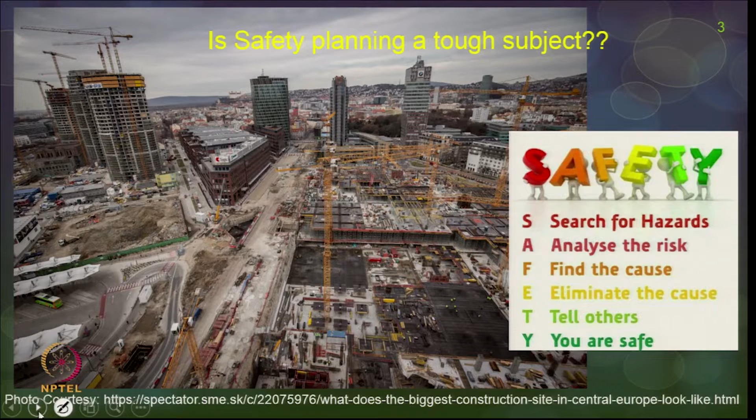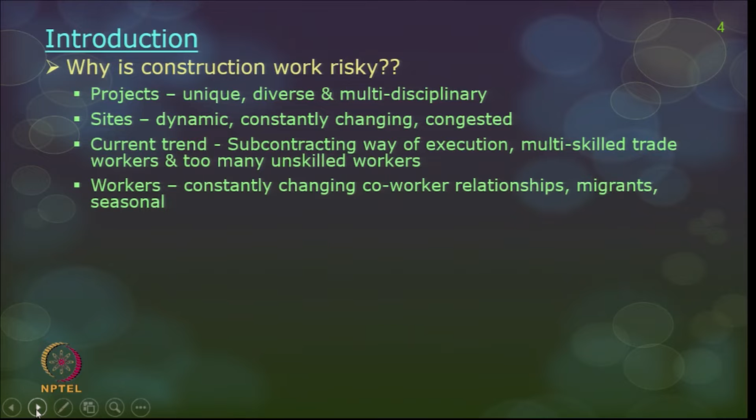Let us talk about why in construction we are not able to achieve a safe environment compared to other sectors. For example, safety is a major concern in every sector like aerospace or manufacturing, but why in construction is it so fuzzy, and why is it not achieved even till date? There are so many factors which are unique to construction projects alone, and let us discuss a few of them.

As such, let us talk about the projects. Most of these projects are unique. For example, if you do manufacturing of a car, you may be manufacturing the same model repeatedly, so you know what the hazards are, you know the sequence without too much complication, you know what safety precaution will suit you best, and so on.

In construction, projects are unique, so the learning you get in one project you may not be able to apply in the next 4 or 5 projects. That knowledge and experience you got in one project you may only apply after 5 or 10 projects. That doesn't happen in other sectors.

Construction projects are always very diverse. You have so many engineers, starting from architects, structural engineers, MEP engineers, then consultants, vendors, suppliers. So many people come in and play their role. It's actually meeting different minds, and at the same time getting work progress done while maintaining a safe environment is quite challenging. As a result, projects are most often multidisciplinary.

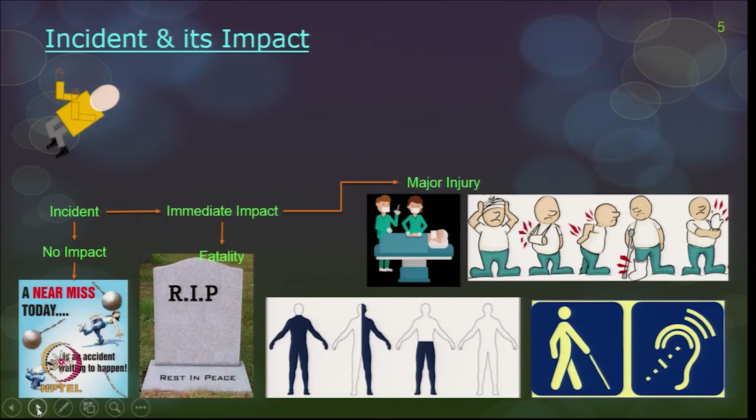Moving from the most serious impact to the less serious ones: the next one is major injury, interchangeably also called an accident. So what is an accident? Maybe you get paralyzed - and there are many types of paralysis, as seen in this picture, either one-side paralysis or complete body except the head paralysis. There are so many medical terms for this. Or you get hurt very seriously such that you lose your hands or legs or any limb, or you become deaf, or something like that. These are all examples of a major injury.

Minor injury - maybe you get a fracture or a contusion, or there's swelling in your organs, something like that, where you get recovered and are back to work. This is colloquially expressed as injury also. So, from the most severe impact: first fatality, then major injury or accident, then minor injury or injury, and then near miss. Then first aid cases are also there - first aid cases are not even visible in any construction site.

First aid cases, you go to the first aid center and get treated within 1 to 2 days maximum, then you return back to work. So, they are not that serious in any construction sites.

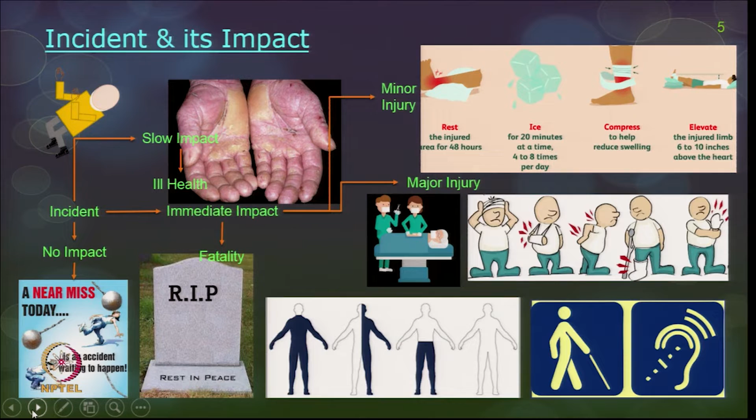The other one is slow impact. There can be hazards which create slow impact onto the workers. For example, if you work continuously handling cement without wearing proper gloves, after some point of time you may see a lot of cement dermatitis. These will not happen in just 1 or 2 days, it happens maybe for several years down the line, 3 to 5 years, or some impact can even happen 10 years later. So these are all called health issues.

Now if you look at incident impacts, I am just categorizing everything together. Incident has either no impact, which is called near miss, or immediate impact which gives minor injury, major injury, or a fatality, and a slow hazard impact we call health issues.

If you look at the history of safety, which we will discuss a little later, so far people were worried about only the visible impacts, whatever we call minor injury, major injury, and fatality. That was what was really seen by construction groups, and their safety programs and policies were most often focused only on safety issues in construction.

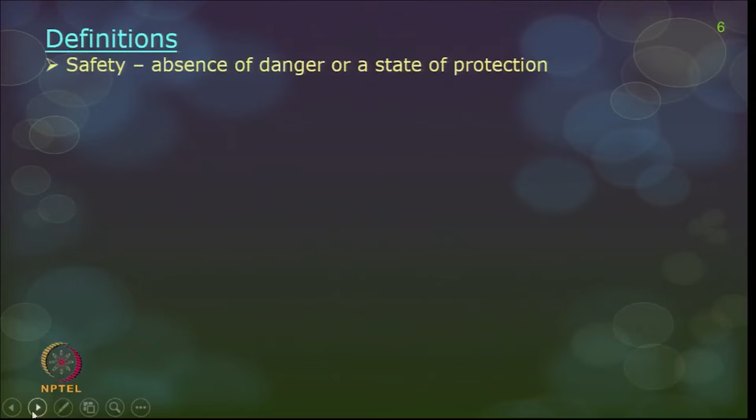So now let us talk about the definitions. What is safety? Safety is always defined as an absence of danger or a state of protection. Then a few of the terminology which we have seen in the previous slide.

Number one is incident. Any incident is an unplanned, unwanted, unexpected, unfortunate event which disrupts the work process and may cause injury or damage. Based on the impact, one is near miss, incidents where no property was damaged, no personal injury sustained, but given a slight shift in time or position, damage or injury easily could have occurred and did not happen this round because of the luck factor.

Now there are some things which have come in the definition. If you look at safety, most of the focus is only on personal injury, in the sense only on the workers' injury. But safety as such has to take care of equipment and materials in the site, and also on the personnel, which implies workers on the site and other human beings on the site. But colloquially, most safety norms and policies are primarily towards workers' well-being in the sites only.

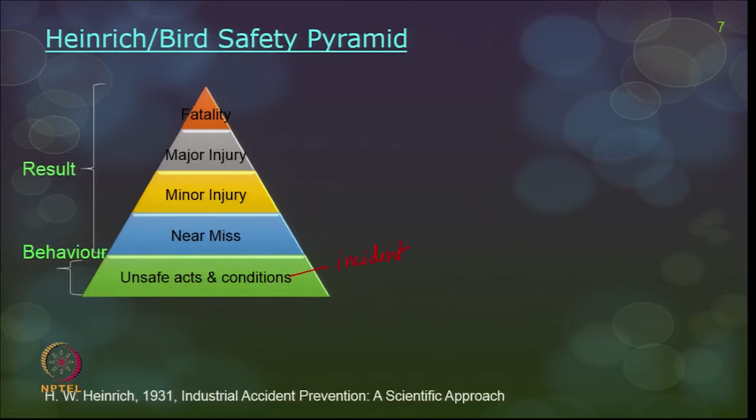This is primarily a safety pyramid. Now, these near misses, minor injury, major injury, or fatality all happen as a result of some incident. As we discussed in the previous class, an incident is of two types: one is unsafe act, the other is unsafe condition.

In many construction sites, as I told you, there may be one or two fatalities that can happen. That is what the statistics talk about. Major injuries can also occur in a normal construction site—we are not talking about complicated or complex projects. In a regular construction site, maximum 1 or 2 fatalities happen these days.

If you look at major injury, there may be at least 30 to 40 major injuries, against at least 300 minor injuries, and near misses can be even up to a lakh. This is some of the thumb rule which happens these days in many construction sites.

But is it really easy to document everything? It is not that easy to document all these issues which happen in the construction site. Most probably the fatality goes into documentation, and major injury goes into documentation.

So the visible portion can be compared to an iceberg. If you see an iceberg, only the portion which is visible is very small compared to the iceberg which actually lies below the sea level. A lot of the hazards which are still available in construction sites go undocumented.

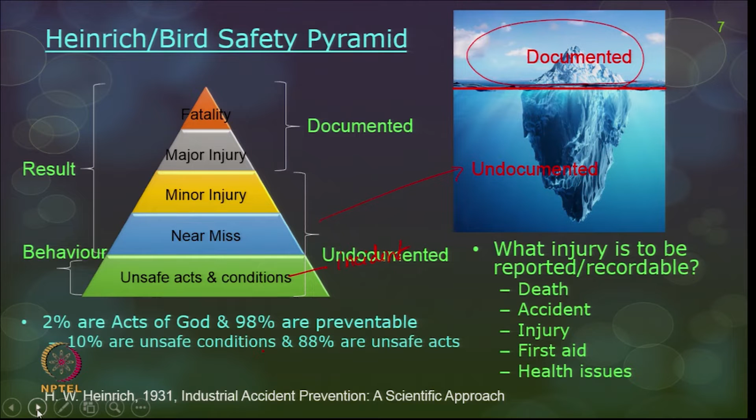Any death obviously has to be reported - the reason for death, why it happened, where it happened, what really happened, what did the worker not do, what precautions did the management not take. So all this has to be reported.

Any accident which happens on site which implies major injury has to be reported for sure. Minor injury, yes, if possible, and if you have a system in place wherein you can record all your minor injuries, yes, it also has to be reported.

First aid cases, yes, including near misses, also have to be reported if you want to have a complete zero accidents record in a construction site. Near misses and first aid cases, even though there are too many happening every day, there should still be a policy of reporting and documenting everything, which should be used as a learning lesson for all the workers.

Last but not least, health issues also have to be reported these days.

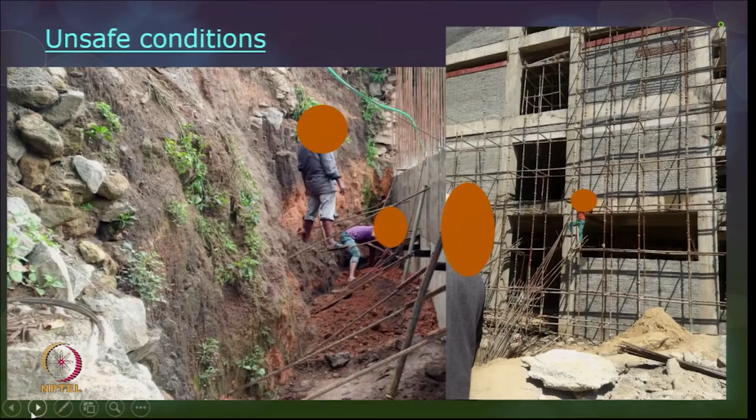Here also you cannot avoid working on these scaffolds and climbing up to do all your construction progress work. So this is primarily an unsafe condition, but there could have been a provision for safeguarding the environment. Still there could have been provision for safeguarding the environment.

The next is unsafe acts. Unsafe acts are primarily ignorance of any safety rule. For example, in this first photograph, the workers are not even wearing proper PPE, not even proper safety clothes, shoes, or a hat while working in a construction site.

So what is this unsafe act and unsafe condition? Unsafe act - it is an activity that is not done according to the safety standards, that is primarily called unsafe act. Examples can be failure to wear PPE, that is the number one unsafe act in construction sites.

Ignoring tool defects - maybe today you were operating some equipment, it didn't work, and you do not even take any precautions in reporting it to the management, and still you try to operate and complete your work. Or you do not know how to operate equipment and you try to mess with its functioning. All these are examples of unsafe acts.

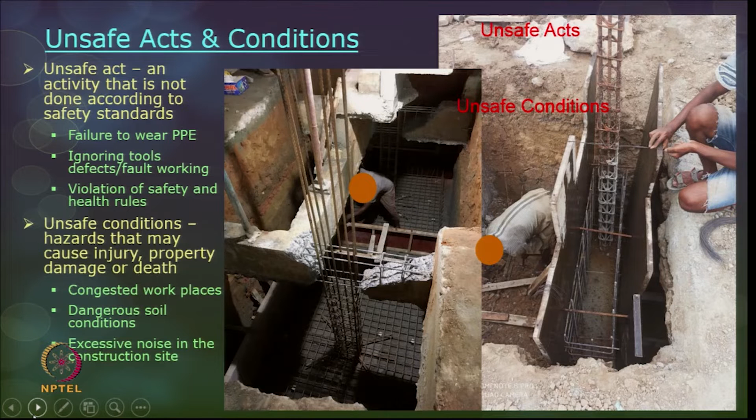Excessive noise in the construction site is also an unsafe condition. You are working in a very big construction site, not operating any equipment, but all around you there are so many equipments producing lots of noise, above the permissible decibel levels. When you're in the midst of so many equipments, your mind will not be at peace and concentrating on safety. So this is an example of unsafe conditions.

The next term which came along together in the introduction was hazard. Many of these terms are used colloquially in so many places, but now you learn the different terms and try to put the proper terms when talking about safety.

Hazard means an inherent property or ability of something to cause harm. As such, hazard is not dangerous, because there are three types of hazard - one of which we will discuss when talking about hazard analysis as a safety program. So every hazard is not active and will not create any harm.

For example, there is an electrical wire passing along a line with equipment also connected to it which was operating - this is primarily an active hazard. If by mistake you slip or trip onto the electric wire and fall off, it can create lots of hazards. And let's complicate the issue further - maybe it's lying along a floor where curing is happening, and curing has water beneath it. So then it's a very serious and active hazard.

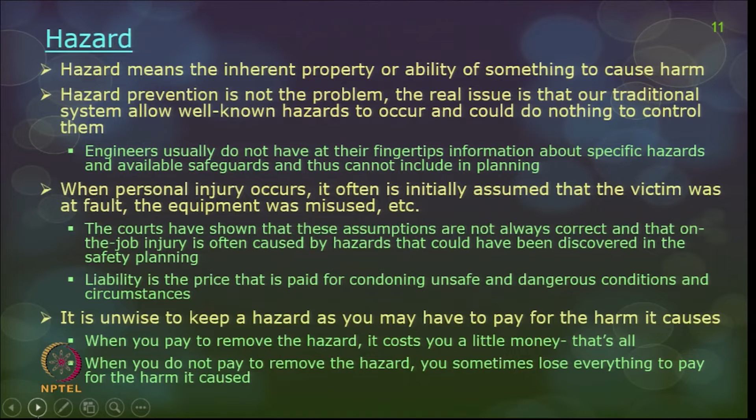So, it is unwise to keep a hazard, as you may have to pay for the harm it causes. When you have to remove it, you have to spend a little money on it. But if you do not try to remove it thinking you may have to spend money, you may have to pay even more than what you anticipated. Sometimes you may have to lose everything to pay for the harm it caused. That is the real message behind hazard.

So, some researchers have also identified the top hazards in a typical building project, and a few of them are fire, unsafe scaffolds, working platforms, open shafts and edges, unsafe electrical equipment, unsafe excavations, unsafe cantilever loading platforms, struck by foreign objects, falling objects, unstable or unsafe structural membranes, overloaded vehicles and forklifts.

Unstable mobile crane, unsafe lifting operations, unsafe working at height, unguarded machinery, and unsafe access or egress.

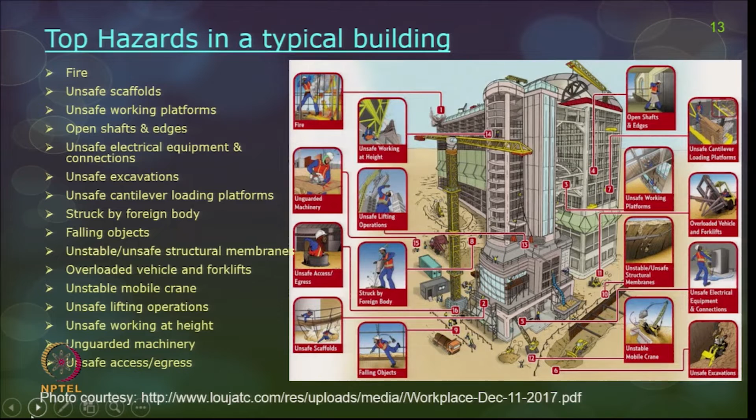So, there are a lot of hazards still available in construction sites, and if you closely watch a project and take note of all this, then you can actually think of a lot of corrective measures and preventive measures for accidents.

Now let us move on into the terminology. So far we have discussed a lot of terminology like fatality, major injury, minor injury, incident, near misses, unsafe acts, unsafe conditions, and hazard.

Now, we will again move back to what is fatality, major injury, and minor injury, and how it is in the present scenario in the construction site. As I told, this pyramid has a lot of numbers attached to it.

Heinrich has proposed that for any one major injury there might be almost 29 minor injuries and 300 near misses. In a way it is 1:30:300.

A lot of researchers have given different numbers, and these numbers have come from different times and from different groups of construction projects. If you want to know how many, this number is quite necessary, because you have to think of safety precautions, how many safety programs and investment on safety you primarily do based on some assessment of these numbers in your project. So you may have to have an understanding of the number.

Accordingly, the other ratios are 1:100:10,000, 1:10:600, and like this there are so many numbers available.

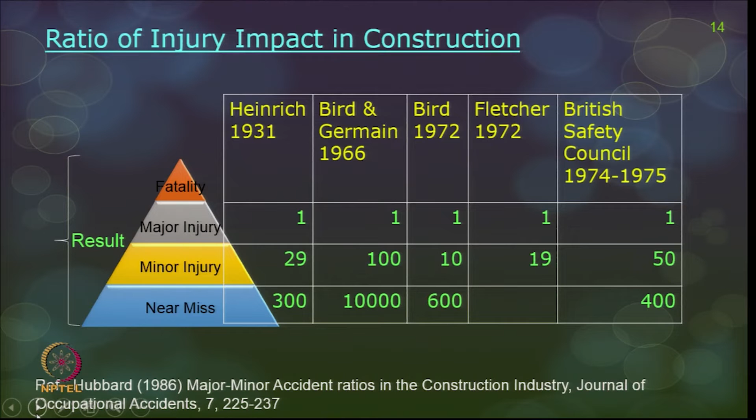So understand, the pyramid always has so many near misses compared to major injuries, and so many minor injuries compared to major injuries, and the same way with fatality. That pyramid still exists. Now let us talk about fatality.

We will go again from the severe impact to the least impact. Number one is fatality. If you look at projects which happened like 50-60 years back, in the 1940s, 1930s, or 1869 and so on, there are very famous projects existing even today, treated as wonders of the world. But if you talk about safety and the number of fatalities that happened, so many of these projects are really considered the deadliest construction projects. Let us discuss a few of them.

The Great Wall of China had almost 10 lakh deaths during construction - and this is only the reported case. The Great Wall of China had many deaths during its construction, and the Burma-Siam railway is actually treated as the death railway because so many workers died during its construction - almost close to 1 lakh people died. The Suez Canal again had 1,20,000 deaths.

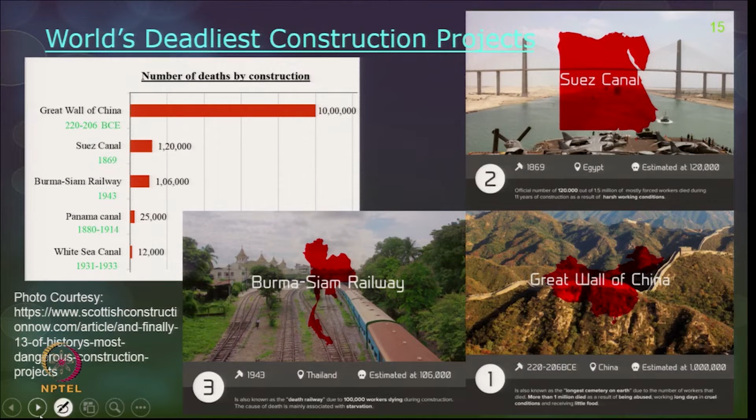So with projects like this, earlier projects had so many deaths, and from then onwards safety became a serious concern. Now if you see, a lot of this fatality has been really cut down, and today, where are the fatalities in a construction project?

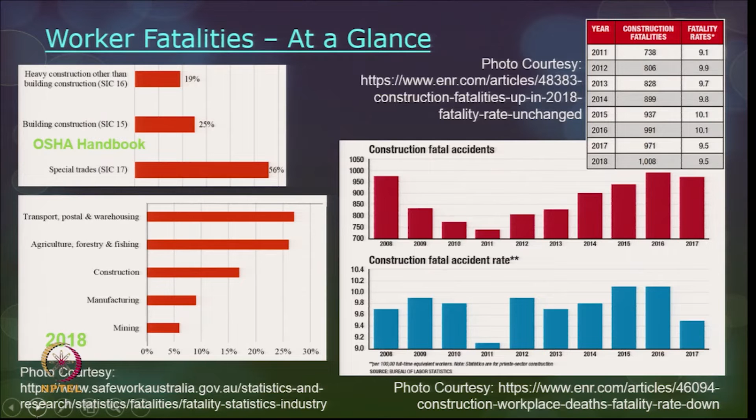There can be so many reasons - maybe there were fatalities which were not reported and the reasons were not identified, so it was not reported. There can be real reasons behind the fluctuations in the death rate, but you should still understand that fatalities are still happening in construction sites, which has to be cut down.

Now if you look at one infographic which says, according to data from the Bureau of Labor Statistics, for 10.3 million workers employed in the construction industry, 991 construction workers were killed on the job. That is the statistic we saw in the previous slide for 2016. For these 991 fatalities, almost 82,760 non-fatal injuries and illnesses have happened - this is actually a combination of major injury and minor injury put together.

So what people generally say is, more than fatality, major injuries are real pain and a major problem to construction workers. With fatality, the worker is no more, only his family suffers as a result of the loss of the worker. But when you talk about major injury, a person has to survive the remaining part of his life either without his eyes, without his legs, or without his hands, and he has to be dependent on someone for the rest of his life in order to go through it. That is where major injury is treated as very serious, compared even to fatality.

Instead of death, a construction accident can often cause very serious injuries, and deaths resulting from construction accidents are far better than traumatic injuries or illnesses. What about coma or major brain injury where the person is on bed rest and so on? These are all real serious pain and suffering compared to even a fatality. So immediate deaths have some advantages also compared to all these major injuries.

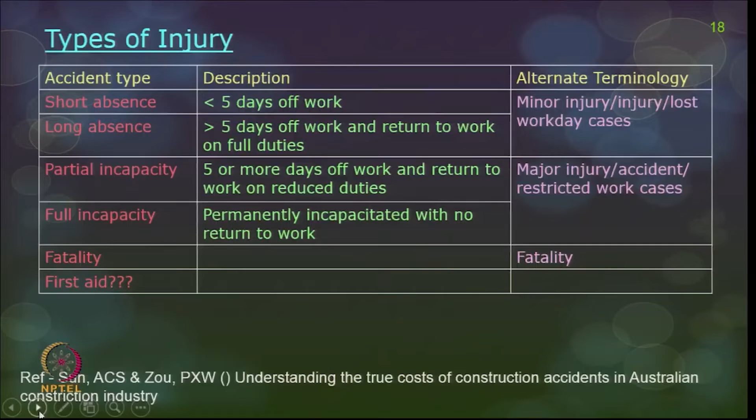Now let us talk about this disability classification. A lot of researchers have talked about so many terminologies. One is short absence, long absence, other one is total incapacity or partial incapacity. Now we will be discussing about permanent disability and total or partial. So total, partial, permanent and temporary.

Again in reverse order, total permanent disability, wherein the worker, after the incident has happened - so now there are two scenarios. One is pre-incident, a worker was fine and fit. Post incident, what is his status? In a total permanent disability, he will be totally disabled and he is permanently disabled. There is no surgery or no alternate solutions provided for him to be fit enough to do any job in the construction site. So a condition in which an individual cannot work due to injuries, examples can be total paralysis, brain injury, mental incapacity or amputation of both hands and legs, both hands or both legs or both together, then he is not fit enough to do any job later on. So he is jobless after the incident has happened.

The next one is partial permanent disability. Partially he is disabled and permanently he is disabled. For example, loss of one eye, with another eye he can still manage and do some job. So partially he is disabled, so he can do some little risky job in the construction site. He may be employable, but the loss of vision on one side is permanent. This is a disability that impacts one's day to day functioning in the workplace. These injured workers generally go back to work once their treatment is over and they are fully recovered, but they cannot do the work with full capacity as they were doing before the accident happened. Examples can be hearing loss, blindness or post traumatic stress disorder and so on.

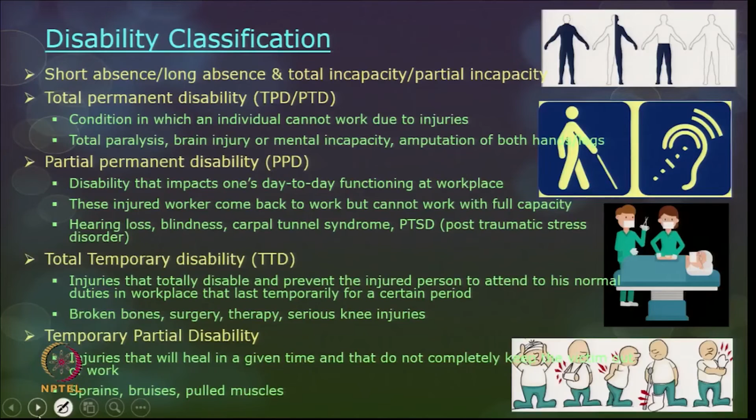But all these result in absence, some sort of productivity loss you show in the construction site. So any safety accident that happens in a construction site has an immediate impact, you see an absence, maybe a short absence or a long absence, but immediately productivity loss happens in the construction site, that you have to keep in mind. So now we will talk about minor injury.

In the previous slide we talked about full capacity, disability and so on. Now what are these minor injuries? Examples are given here. Laceration, for example, a worker has fallen down from the nth floor onto the ground floor, maybe onto reinforcement, and the reinforcement rod has pierced him in several places. So it is not a regular cut and sutures, but irregular cuts and sutures. It is primarily called laceration.

Punctures, as shown in the previous slide on hazards. Hazards like a nail on lumber can be a real example for a puncture or a cut. Fracture, I think it is a very common term. Strains, crushes, sprains, dislocations because of wrong lifting or too heavy loads. Scratches or abrasions which happen when you are handling reinforcement steel or something that does not have a smooth surface. If you handle it with a bare hand, you may have a lot of scratches and abrasions. Contusions, bruises, or internal bleeding which happen as a result of some accident in the construction site.

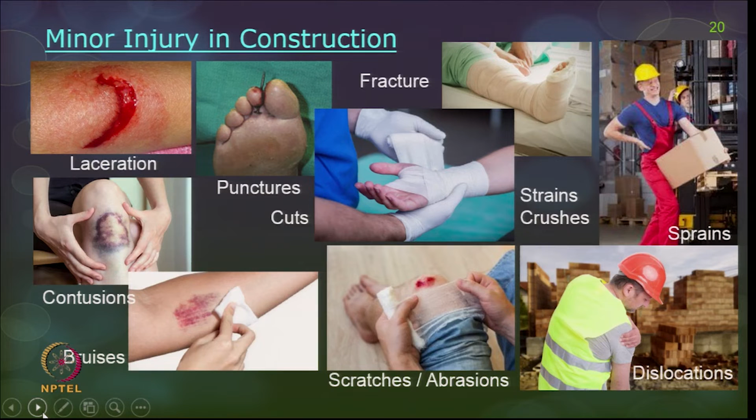So these are all classified as minor injury in construction. If you look at the infographics on minor injury, construction accounts for 31% of fatal injuries, and among all these fatal injuries, at least 31,000 cases are related to ill health issues and so on.

If you look at non-fatal injuries, it can be injury or illness. If you see the trend from 2014 to 2018, it is primarily in terms of lakhs. About 2 lakh something in 2014, and right now in 2018 it is 1,99,000 something. These many injuries and illnesses have been reported.

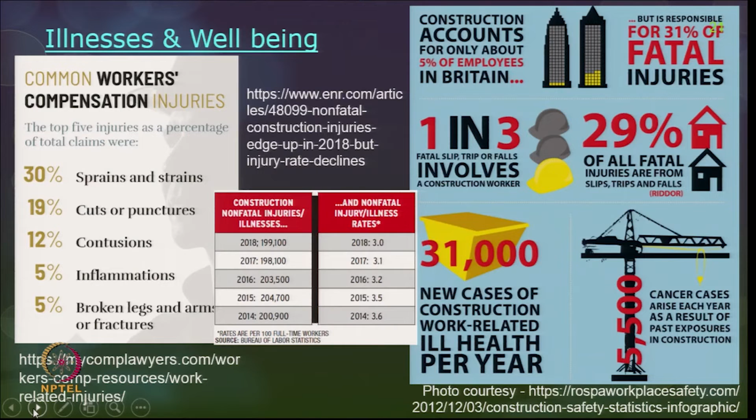If you look at compensation for workers in terms of minor injury, 30% have been spent on sprains and strains, 19% compensation were primarily on cuts or punctures, 12% on contusions, 5% on inflammations, and 5% on fractures. So that is where most of these compensations were paid to workers for minor injury.

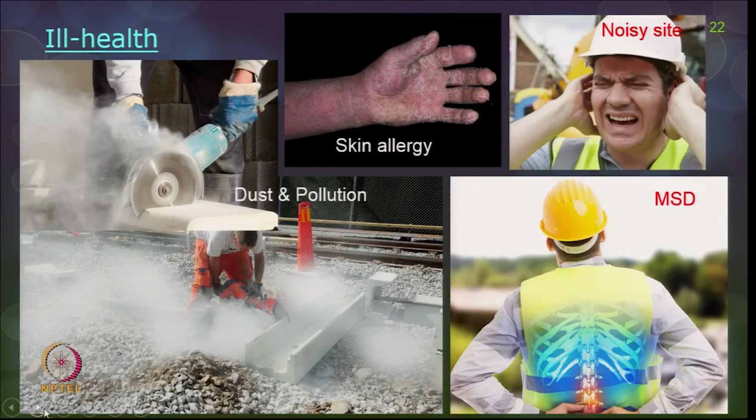Now let us talk about ill health. Ill health examples, the main example is dust and pollution. Any construction site, you cannot avoid the dust and the pollution as a result of the dust. The other one is allergic reactions, primarily because of cement. Every construction these days is dependent on concrete, so skin allergy or dermatitis is the number one health hazard you may see.

The other one is noisy sites, because of a lot of heavy equipment handled in the construction site. Noise levels cannot be compromised in a construction site.

Over some point of time, hearing impact or hearing loss can happen if you do not take proper precautions. The other one is musculoskeletal disorders as a result of wrong lifting of loads. Maybe you have to call a co-worker and get his help in lifting loads if they are too heavy. Instead, if you start doing wrong liftings, you may end up with musculoskeletal disorders.

So what are these adverse health effects? There are so many of them. We will talk about health issues in one of the classes after a few. So any change in body function or the structure of cells that can lead to disease or a health problem.

This can include a disease or change in the way the body functions, grows or develops, effects on children, grandchildren and so on - some problems can be transferred, it's all heredity. Decrease in lifespan, change in mental condition as a result of too much stress or traumatic experiences, and effects on the ability to accommodate additional stress. These are all examples of issues with regard to health.

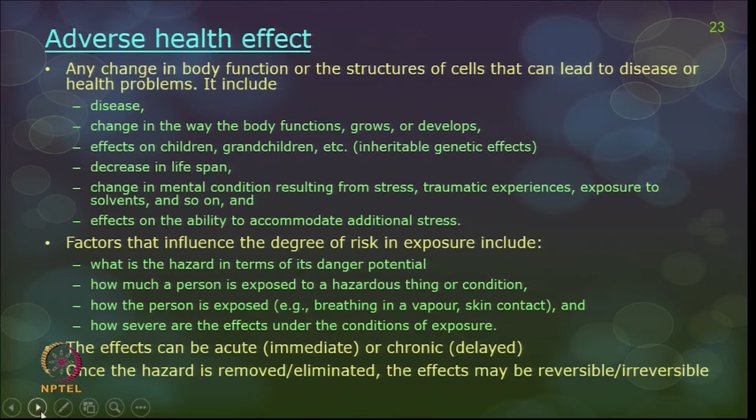The other issue to keep in mind is, once the hazard is removed, eliminated or safeguarded, the effects can sometimes be reversible, and some effects are not reversible. For example, if you start taking treatments and avoid cement exposure or dust exposure, slowly you can be completely recovered. But with any solvents or explosives that have affected workers, some of the effects are irreversible.

Now, what about the growth of the construction industry? So far we have talked about terminologies with regard to accidents, starting from fatality, major injury, minor injury, near misses, and also ill health. Now every time this issue came in - construction projects today are not like how they were earlier.

So what was the growth of the construction industry? Let's not go too far back, let's talk maybe from 40-50 years down the line, from 1960 to present. What has happened? From low rise building structures to a lot of skyscrapers and infrastructure projects these days, like metro or even airports and so on.

If you see the trend, several of these famous, iconic, challenging or mind-blowing structures in the world were built only after the 1980s, with few exceptions built before. Otherwise most of these structures were built only in the recent past.

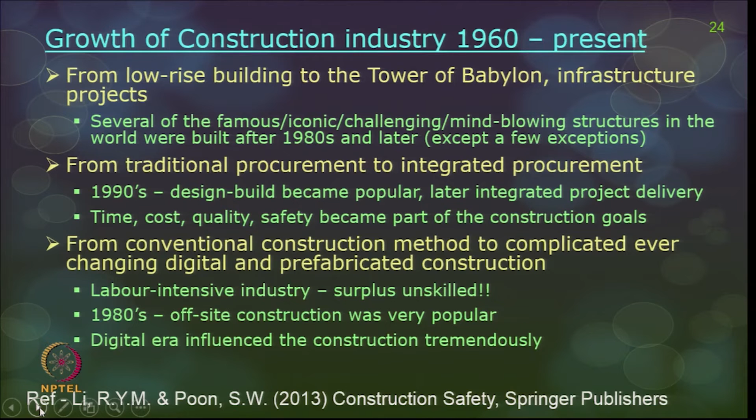The digital era also influenced construction tremendously these days - BIM and other tools came in. As a result, we are able to move into robotics, 3D printing, and also use drones for a lot of safety precautions. Lot of laser scanning and other technologies have all been there to help construction growth. So projects are always having a lot of change in trend these days.

Now let us start looking at what are the causes of construction accidents as a result of the growth in the construction industry over the last 50-60 years.

Number one, we categorize it as human issues - human error, misjudgments, unsafe acts, and so on - relationship with colleagues. Because of the subcontracting way of relationship, you may have poor relationships with colleagues, which may be a real reason for accidents. Suppose if you have friends moving as a gang from one crew to another, obviously your friends will tell you of potential dangers in the construction workplace.

For immigrants, there may be a poster in the local language, maybe in Hindi or something, and the immigrant worker may not be able to read that language, so he may not understand what is written there. So diverse culture and language is also a cause for accidents.

Insufficient safety training and education - most of these issues are common sense. You should always know you should have proper PPE when working on a construction site. Most of it is common sense, but that does not mean common sense is equivalent to safety education. There should be proper training and education on safety, and workers should be reinforced on safety every now and then, maybe in toolbox meetings or during safety training.

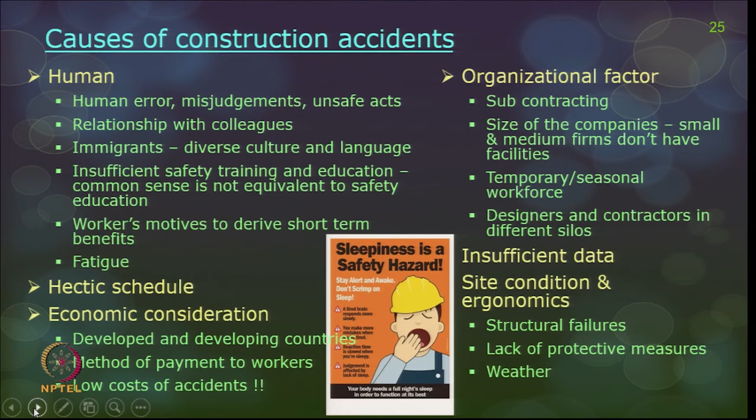That is obviously true for site conditions and ergonomics - structural failures, lack of protective measures, weather is again another issue. When you have bad weather, for example heavy rainfall, heavy snowfall, or maybe very hot summer, you should not be expecting too much productivity from the workers in the construction sites.

Now, why prevent accidents? There are so many reasons. Humanitarian reasons - the one which is not documented anywhere - that is primarily human suffering, it can be physical pain, hardship resulting from death or disability. With the loss of one earning worker, the family has to suffer the loss and still go ahead with their lifestyle. Then there is physical pain if there is a major injury, and all this there is no way to document, and these should not happen. So accidents have to be prevented.

Moral reasons - till date construction is always treated as very dangerous, so this awareness has to be taken care of. The worker morale can always be strengthened with lots of other programs, safety programs at the construction site, but still the workers have to be having a positive feeling that sites are always safe. That is another reason.

Legal reasons - civil law also enables injured workers to gain compensation, citing that a reasonable standard of care and protection was not provided. So it is primarily an employer's duty of care to give a proper safe site and safe place to the workers.

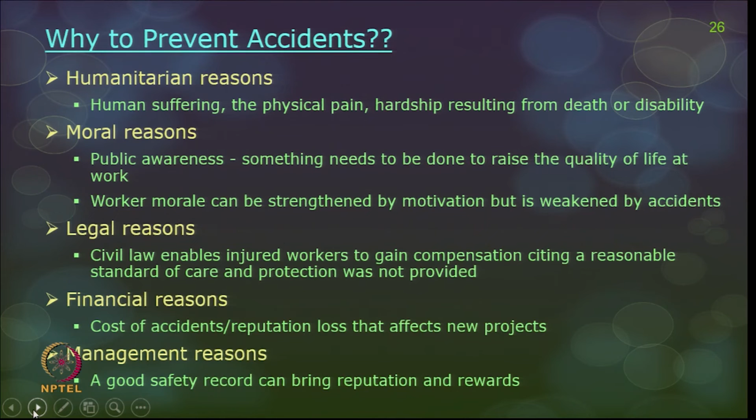Management reasons - a good safety record can bring lot of reputation and rewards to the workers. So, when do these injuries occur?

Now let us talk about when and how these injuries occur. Although there is no specific pattern, statistics show that a pattern is available at a construction site, and if you watch closely, the pattern is linked with some logic and gut feel sense. So, there are no hard and fast rules that tell when most injuries occur in a particular project.

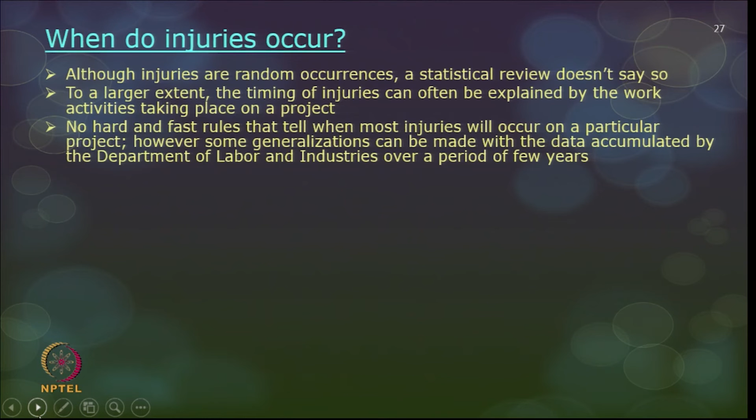However, some generalizations can be made with the data accumulated by the Department of Labor and Industries. Over a period of years, some statistics were gathered, and this can change from project to project - this is not a recent report, it happened several years back. So you may have to think about it and try to formulate statistics to create a new record on how injuries are happening in your construction project site.

Hour of the day - in a normal construction site, a regular project, not the exceptional ones, the project starts at 8 o'clock in the morning, and the workers start reporting to the site. As soon as the workers start reporting, they report to the site supervisor to know what their work is for the day, and then they start collecting their equipment, tools and so on. By the time they reach their construction workplace, it is close to 8:30, or sometimes even 9 o'clock.

If there is a small briefing, safety precaution, or some gathering to happen, and then they move to the site, work generally starts by 9 o'clock. As soon as the construction worker starts their work, the productivity is never at the maximum. It takes some time for the worker to get into the work, to get his mindset into the workplace, and only by 10 o'clock does the work start picking up.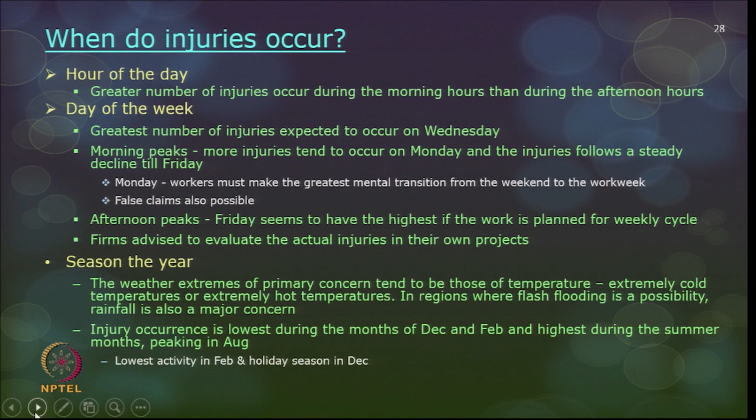Season of the year: again extreme weathers should be a real caution. When we talk about health hazards, we will talk about cold stress, heat stress, and so on. Extreme cold and extreme hot temperatures are generally a serious concern, and adequate breaks should be given to workers instead of imposing a hectic schedule. Also, where rainfall is a possibility in some regions, it should be taken into consideration when construction works are happening.

So, to recap, types of accidents in construction sites: so far we have talked about total disablement, partial disablement, vehicle related injuries, unsafe acts related injuries related to workers' misbehavior in the construction site, unsafe conditions related injuries, location of injury - whether external organs or internal organs injured, and so on.

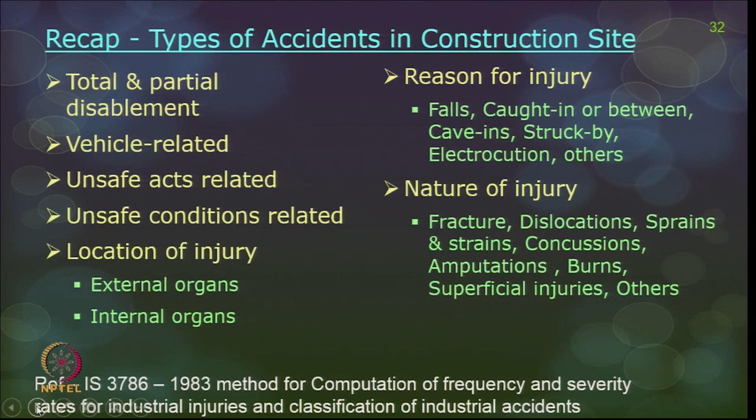Reasons for injury, we will see a little later. Actually from week 3 onwards, you will have all the lectures arranged along these: fall, caught in or between, cave in, struck by, electrocution and so on, and the operation wherein each hazard is seen to the maximum will also be covered alongside these hazards. We will see this from week 3 onwards.

Nature of injury: again fracture, dislocation, sprains, strains and so on. So, with this I am stopping for today's class. Thank you.